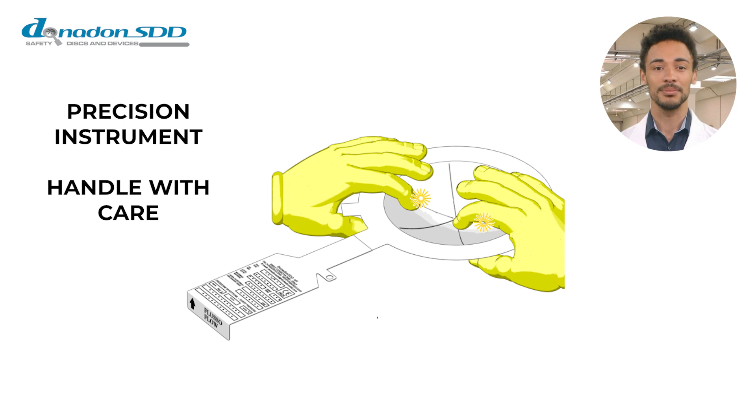This video is intended to supplement the written instructions, further simplifying the procedure and assisting you in achieving an optimal setup. The rupture discs and tag plates are constructed of metallic materials, which means edges could be sharp. To ensure your safety during handling, always use protective gloves.

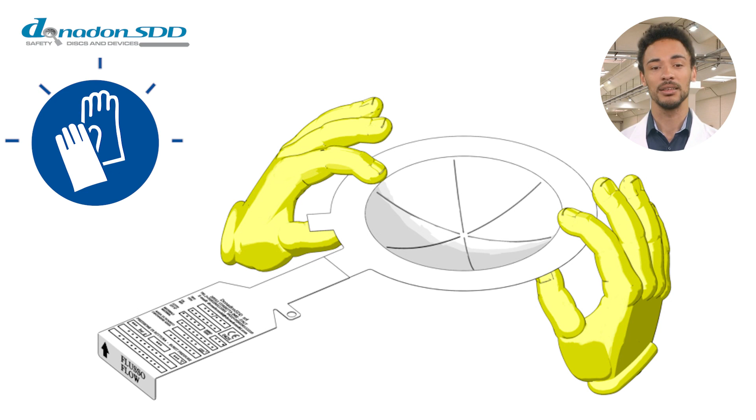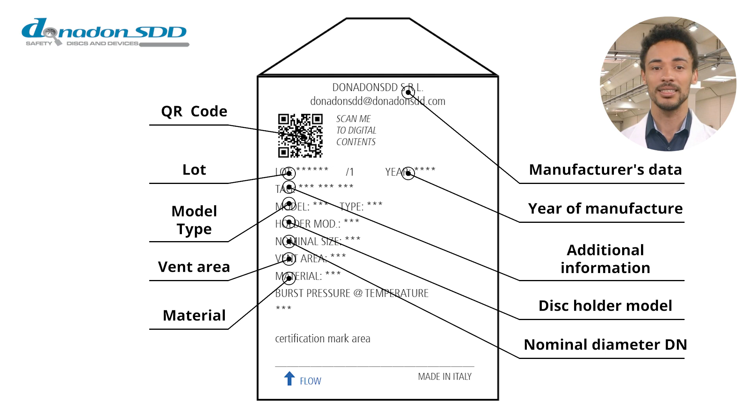The label on the rupture disc and holder of the safety device contains important product data. Additionally, a QR code is available which provides access to certificates and other valuable information. Remember to verify the correct value of the burst pressure and the discharge temperature that the disc is designed to handle on the tag plate of the rupture disc.

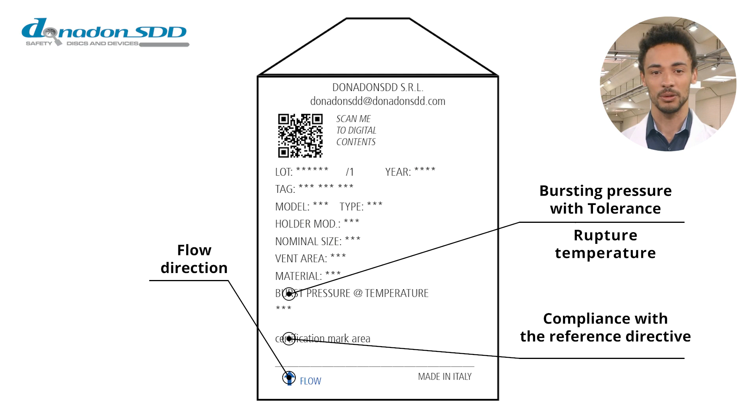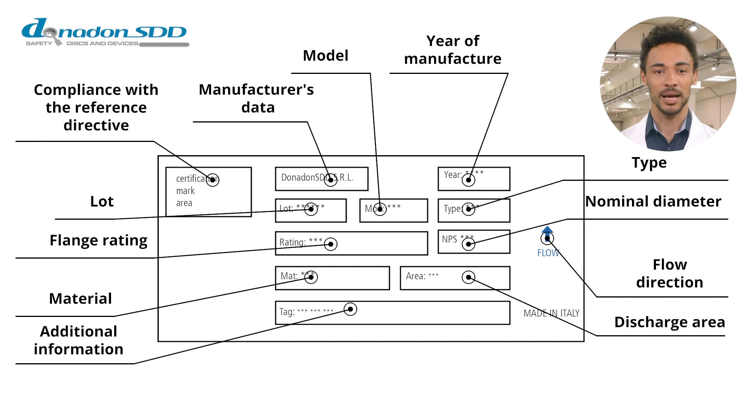To ensure that plant requirements are met, it's important to thoroughly check the compatibility between disc holder and flanges, as well as other parameters, and compare these with the information provided on the disc tag plate. Compatibility between the disc and disc holder is type dependent. Therefore, it's crucial to verify that the type marked on the disc plate aligns with the type indicated on the disc holder plate.

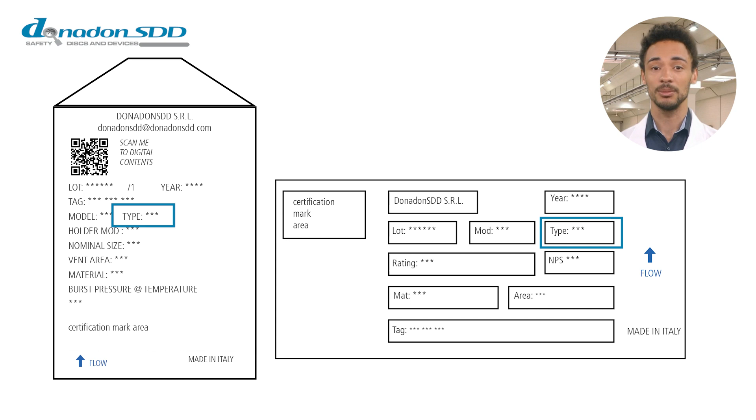For your safety, we highly recommend the use of protective equipment such as gloves, a helmet, safety glasses, and safety shoes during the handling and installation process. Before we proceed, please take note of the following general recommendations to ensure optimal performance and safety during the installation and maintenance process.

It is the user's responsibility to build and size the piping system on which the safety device is installed in a way that ensures resistance to all the loads it will be exposed to, including the reaction forces resulting from the rupture disc discharge. The position of the rupture disc on the plant must be duly indicated as a danger zone.

Installation or maintenance operations must not be carried out on the rupture disc while the plant is subjected to operating pressures or temperatures. Do not install the rupture disc in places where people and/or things might be hit by the pressure release in case of device opening. Discharge toxic, harmful, dangerous, flammable products or any fragments released by the rupture disc or by the plant in a safe place to avoid damage to people or things.

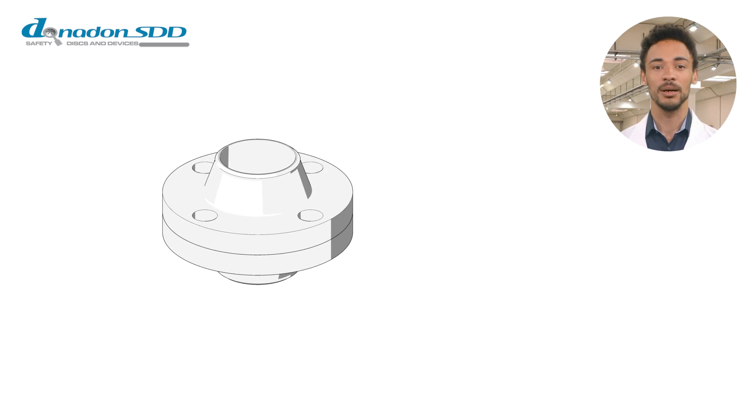Ensure the system flanges are aligned according to the guidelines provided in ASME PCC-1, Appendix E. Make sure that the product is not damaged in any way, is not scratched, dented, scraped, or smeared with foreign material. Do not install damaged rupture discs.

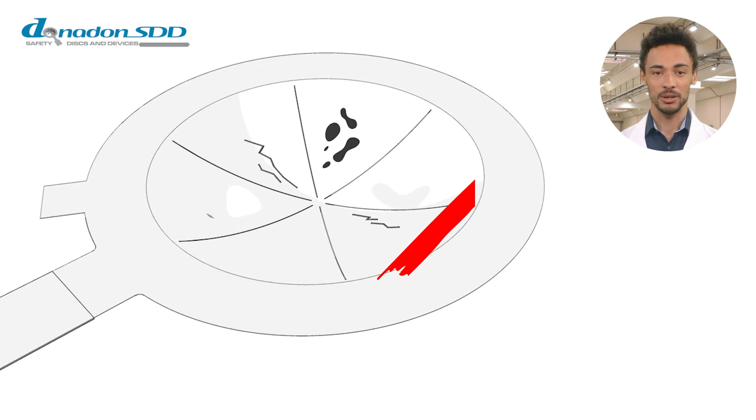Before installing the rupture disc, always clean the holding surfaces of the holder, both at the inlet and at the outlet. The surfaces must be free of rust, corrosion, and foreign material. Use solvents that are compatible with the application, taking care not to use abrasives or materials that could ruin the surfaces.

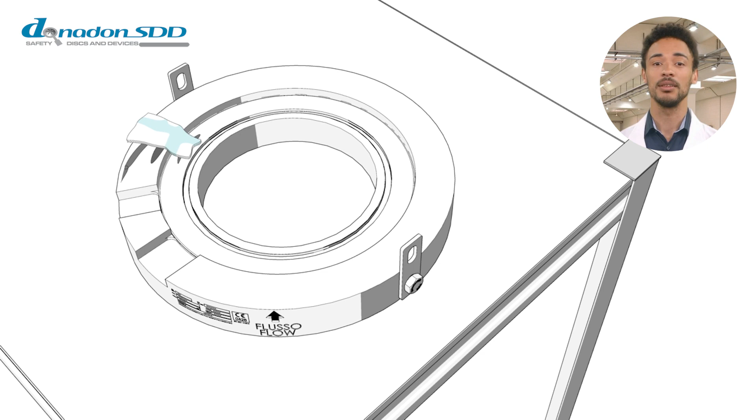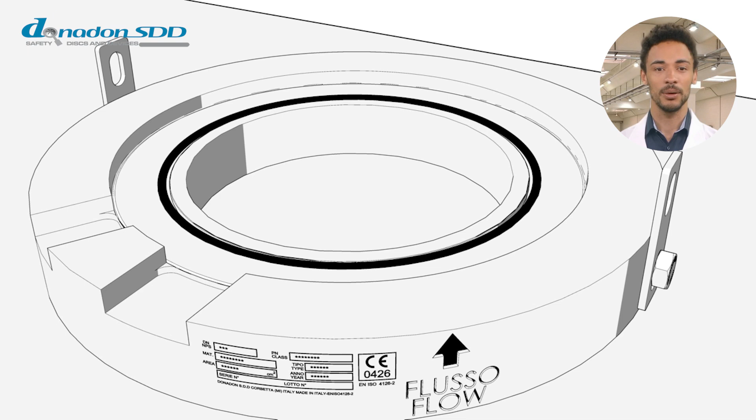Position the ring on the process side of the disc holder, ensuring it's on a secure and flat surface with the flow arrow directed upwards. Should your disc holder come equipped with a groove, it is crucial that you correctly insert the O-ring into the holder's housing. However, please be aware that this isn't a standard supply configuration.

Position the disc with utmost care in the disc holder, checking that the flow arrow on the disc tag plate is facing upwards. It's crucial that you do not install seals between the disc and the disc holder. This can interfere with the function of the safety device.

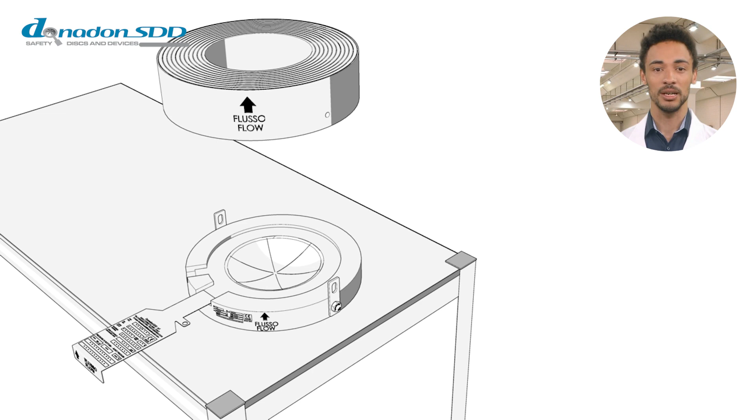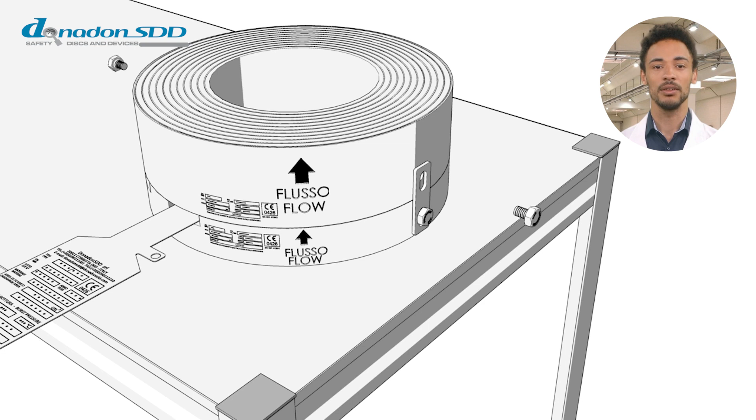Install the discharge side ring of the disc holder with the flow arrow directed upwards. Be sure to align the side pre-assembly holes and exercise caution during this process to avoid damaging the disc and the holder seats. Check that all flow arrows are oriented in the same direction. Proceed with the installation of the side pre-assembly bolts and manually tighten them to secure their position.

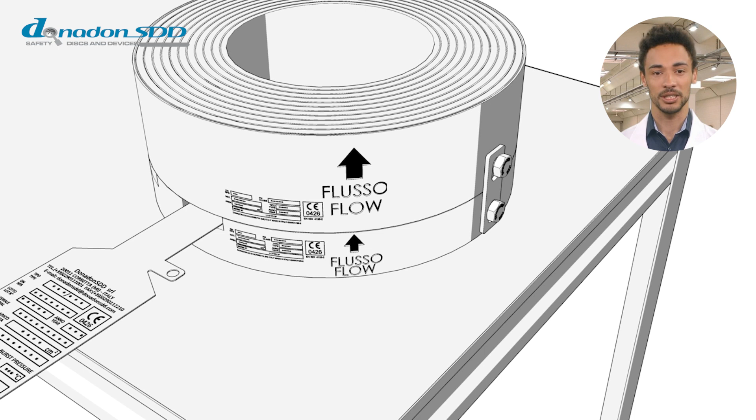For products in our range that comply with the ATEX 2014/34/EU Directive and the UKSI 2016 No. 1107 UKCA Regulation, specific guidelines are in place. Please follow these instructions diligently to ensure optimal performance and safety. These compliant units are equipped with a connection for plant earthing. Please refer to the accompanying image to identify the grounding symbol's location.

The grounding conductor must be connected to the main body of the equipment, either using the provided screws or another system that guarantees an efficient electrical connection. Rupture discs that comply with these regulations and directives are not considered as ignition sources. Instead, their purpose is to safeguard the plant from incidents of overpressure.

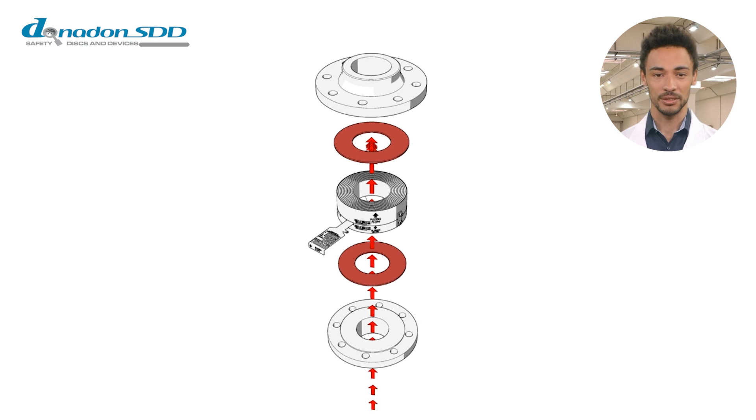Ensure that the disc and disc holder unit are correctly positioned between the flanges, with the holder accurately centered in alignment with the flange tie rods. Install a gasket, made from a material compatible with your specific application, between the process side flange and the holder, as well as between the discharge side holder and flange. It's vital to verify that the holder is compatible with the flanges and that the assembly arrows are oriented in the direction of the line flow.

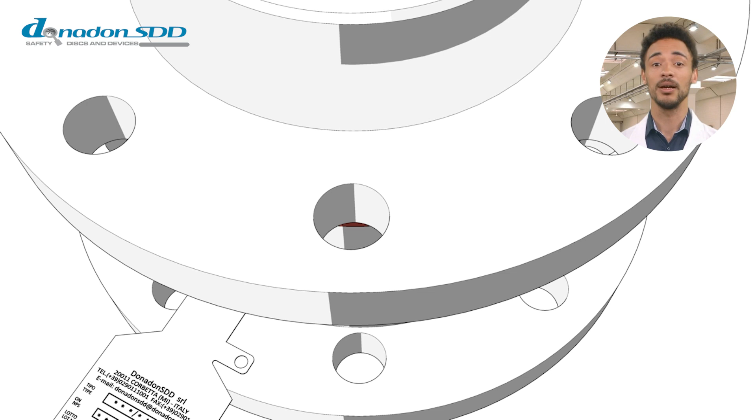When tightening, keep the faces of the coupling flanges parallel. Check that the space between the process flange and the process side holder is equidistant on the whole circumference of the holder. Before tightening the flange bolts, the side assembly screws must be loosened because they can cause misalignment between the process side and the discharge side of the disc holder, and consequent misalignment of the flanges.

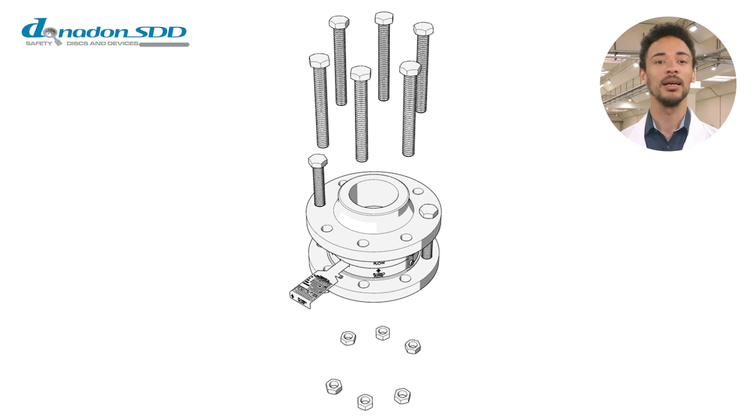Proceed with manually tightening all bolts. It's important to ensure that the clamping nuts and bolts of the flanges can rotate freely. Prior to installation, the threads should be lightly lubricated with an oil, preferably of the SAE10 type or equivalent, to ensure ease of operation.

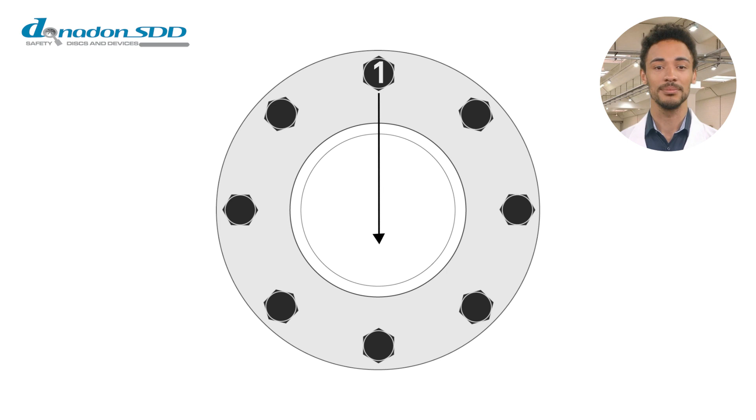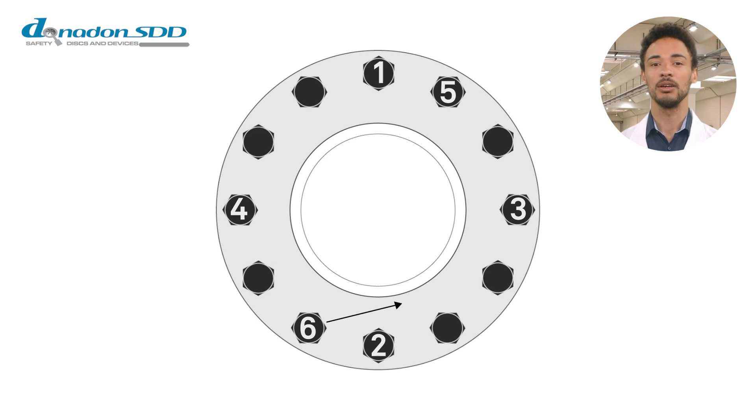Tighten the bolts to 1/2 of the desired value. Follow a cross pattern for the tightening process. After securing the first bolt, move to the one directly opposite and tighten that. Then proceed to the bolt that is furthest from the ones already tightened, and then move to its opposite. Continue this pattern until all bolts are properly tightened to ensure flatness. Repeat the same sequence and tighten the bolts to the desired value, according to the instructions of Donadon SDD.

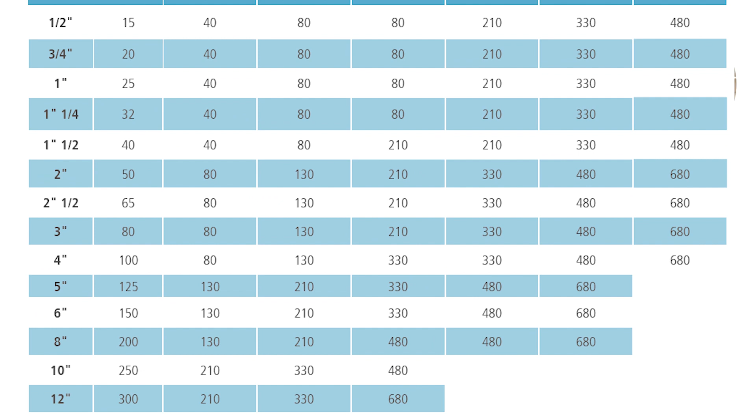Under specific conditions, it may be necessary to retighten the flange bolts after the system has been subjected to pressure and/or temperature cycling. The non-observance of the tightening torques could lead to incorrect operation of the disc.

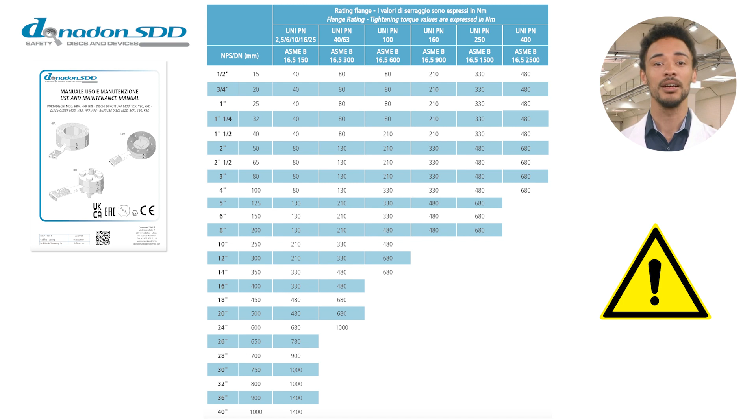After a specific period of operation, the rupture disc must be replaced to avert premature rupture. This period greatly depends on the unique operating conditions of the plant in which the disc is installed. As a general guideline, we recommend replacing the rupture disc 2 years post-installation. For further guidance to assess this period, kindly refer to Appendix B of the UNI EN ISO 4126-6 standard. We advise replacing the rupture disc during routine operational or integrity checks.

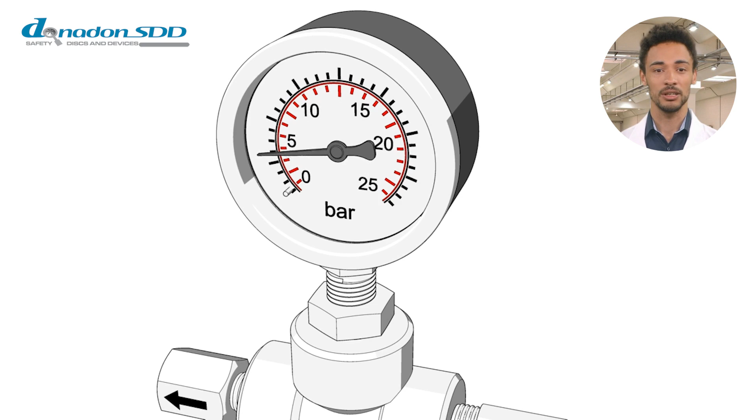If you're considering reusing a previously installed rupture disc that is still intact, please consult with Donadon SDD to verify the disc's appropriateness for further use. Before you commence any disassembly operation on the device, ensure that there's no pressure in the system. If a rupture sensor is present, disconnect it electrically. For detailed instructions on how to do this, please refer to the relevant manual.

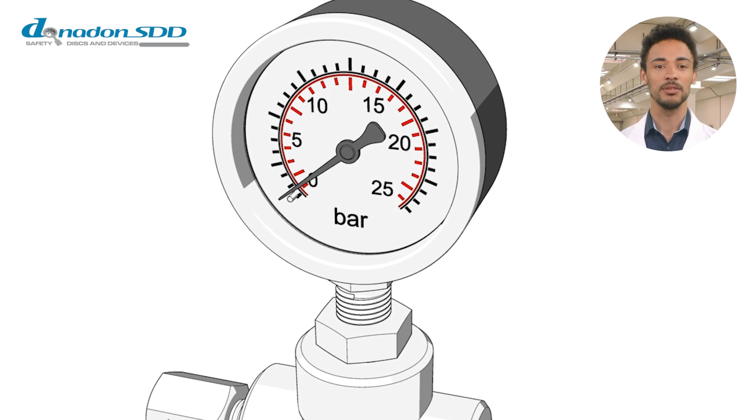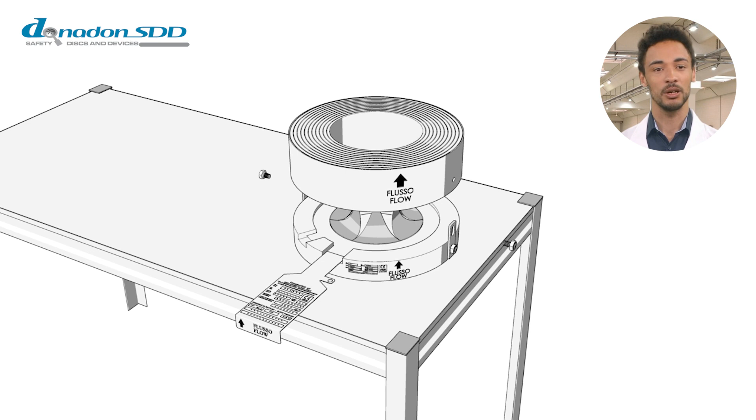Before removing the holder and disc assembly from the line, verify that the pre-assembly bolts or screws are securely tightened. Then, carefully position the assembly on a secure, flat surface with the flow arrows facing upwards. Unscrew pre-assembly bolts and screws in order to remove the disc holder ring on the discharge side, making sure that no part of the disc holder can slip or fall. Proceed with the removal of the ruptured disc and any old O-rings if present.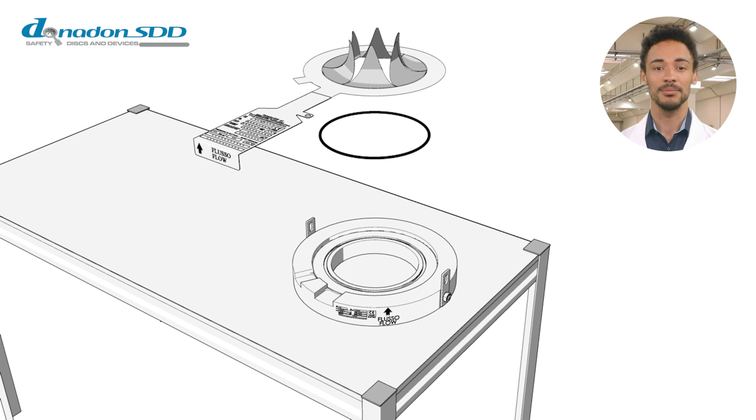Carefully inspect all the holder seats to confirm their integrity. If cleaning is necessary, use non-abrasive solvents that are compatible with your process fluid to prevent any damage. Do not perform mechanical workings on the disc holder. Do not install a damaged rupture disc. It is essential to install Donadon SDD rupture discs exclusively in our proprietary disc holders.

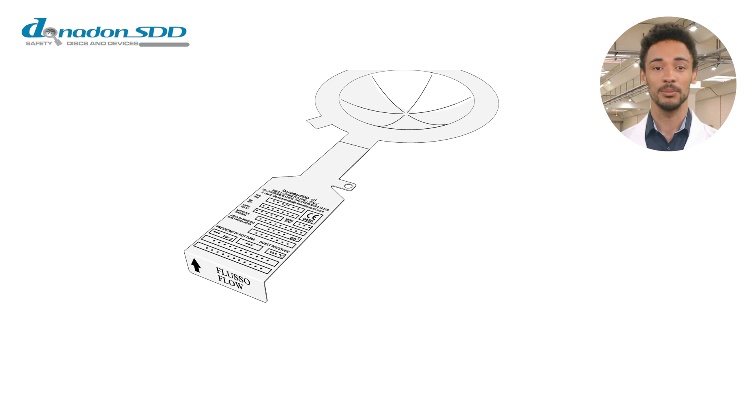When ordering replacement discs, please provide the previous lot number, which can be found on the tag plate or the product certificate. Donadon SDD maintains comprehensive records based on these lot numbers, facilitating the easy identification and provision of the correct replacement.